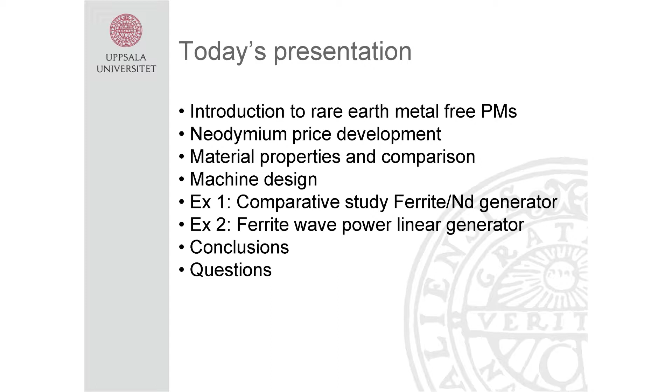So this is what I'm going to talk about today. I'm going to talk about rare earth metal-free permanent magnets and give an introduction to the topic, and also the neodymium price development, which kind of started the look for new materials. I will also go into material properties and compare a few different materials. Then I will go into machine design and discuss how we can change our machine design depending on what kind of material we have. Then I will present two examples on the work we have done on Ferrite generators, and then some conclusions and some time for questions.

And you will be able to follow where I am at in the presentation on the left side here.

Okay, so I come from a division that is working with very applied research. We work with wave power, wind power, and marine current power. We actually build prototypes, even full scale if possible, and do experiments and try how they work. We also have a lot of spin-off companies in these different areas, so we try to bring the products out on the market.

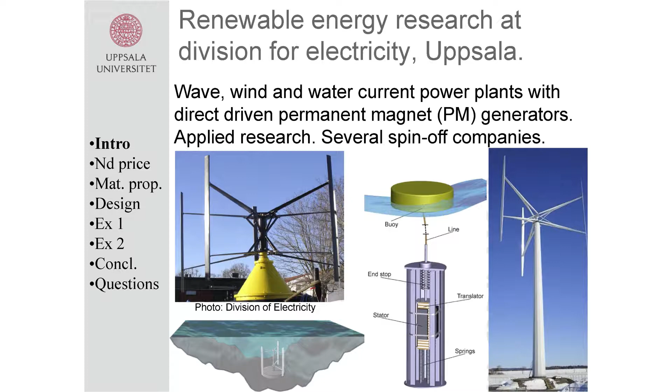We work with vertical axis wind turbines, which is a different type of wind turbine. I'm not going to go into that much, but we have the generator on ground level, which is quite convenient, especially if you happen to have a heavy generator, which I will come into later.

We also work with vertical axis turbines for marine current energy, so we can put these power plants in a stream or in a tidal water and harvest energy. This is the first prototype that was installed in March, and here is how it might look when it's on the seabed.

And then we also work with wave power. This is based on a buoy as a point absorber, and when it moves up and down with the waves, it will pull the translator of this linear generator also up and down. This is maybe the most mature of these products if we look at the spin-off companies.

So we're actually building the first 42 wave power plants right now, or wave power units, for a farm. It's going to be 420 wave power units in this farm. It's ordered by Fortum, and it's going to be placed outside of Sweden. So that's quite a big project.

And for all these different energy devices, we use direct-driven permanent magnet generators. When it comes to direct drive, the generators are quite big, so we also have quite a lot of permanent magnet material in them. Therefore, it's quite interesting for us to look at permanent magnet materials.

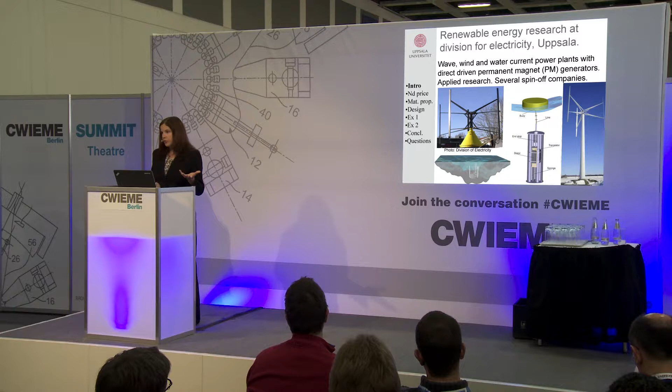Five years ago, we only looked at neodymium-based magnets, but now we're looking at some options. So we're trying to find some rare earth metal-free options. And why do we want to do that?

Well, first of all, the price development. I will show you a picture of that later, but I think you are probably all aware of the problems with the price when it comes to neodymium.

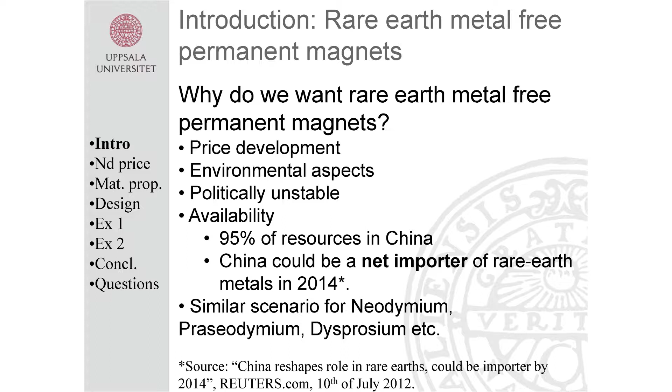We also have the environmental aspects, both for the environment as such, but also for the work environment, for the people working in the mines. Also, it's a politically unstable matter, since most resources come from one country, and it's connected also to the availability.

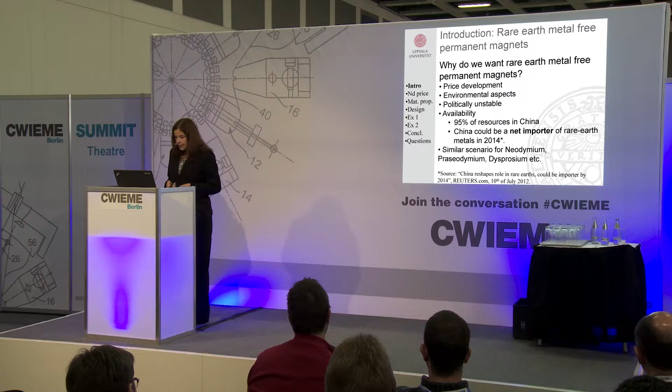95% of the resources are in China, and there's actually quite a stunning report from Reuters, which I found, where they said that China could be a net importer of rare earth metals in 2014. That would be quite interesting. The scenario is quite similar for neodymium, praseodymium, and dysprosium. So it's quite interesting to look at options then.

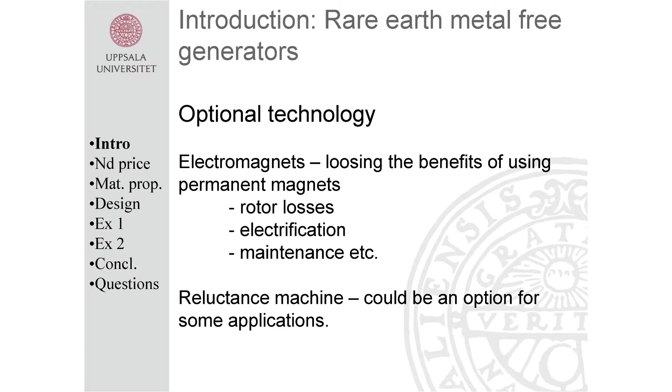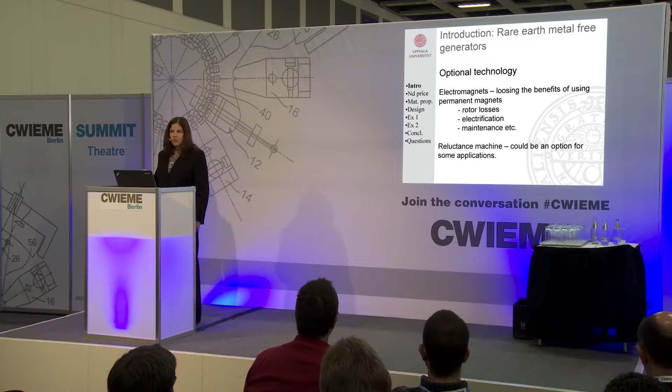If we're looking at options for generators and motors, of course we can look into an optional technology. We could have electromagnets, however then we would lose all the benefits with having permanent magnets. We would get more rotor losses, we would need to electrify the rotor, we would need more maintenance, etc. Another option would be reluctance machines, and I know that is especially investigated for electrical cars, to use reluctance machines.

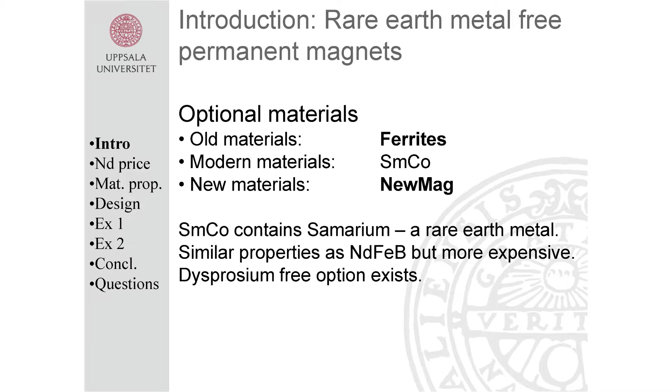But we are instead looking at optional materials. What we have been mostly looking at so far is an old material, the ferrite, which has come a long way - the new grades are quite good. We also have some other modern materials apart from neodymium iron boron, like samarium cobalt. However, they are also rare earth metals, so we'd like to not use them.

And then we're also looking at new materials together with some material researchers at the university. Here I call this new material NewMag, because we don't really know yet what material it's going to be made of.

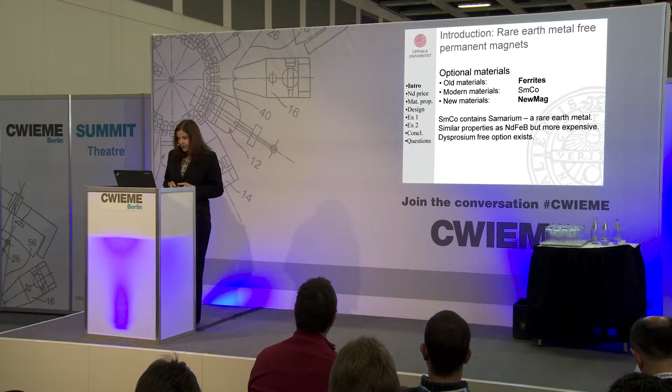So this is a graph on how much the price increased this summer of 2011. The price of neodymium metal increased more than 1,000% from the summer of 2009 to the summer of 2011. And this makes this business quite difficult, and the price is difficult to predict.

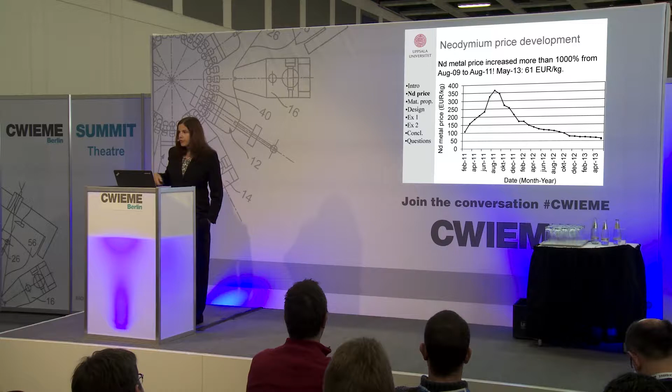This summer, I guess, was kind of the starting point for looking at rare earth metal-free options for permanent magnets. Now the price has decreased quite a lot, but it's still quite high compared to the levels where it was maybe 2007. It's about 61 euros per kilo last month, but it's varying a lot. So therefore, we would like something more stable.

So I'm going to talk a little about material properties and compare some different materials. I just wanted to go into some of the important characteristics or parameters for the materials.

The remanence, the remaining magnetic flux density in the permanent magnet, and then also the coercivity, especially the intrinsic coercivity, which is the external field for which the magnet is permanently demagnetized. It could be partially or totally demagnetized, and then we lose its remanence and it's not a permanent magnet anymore.

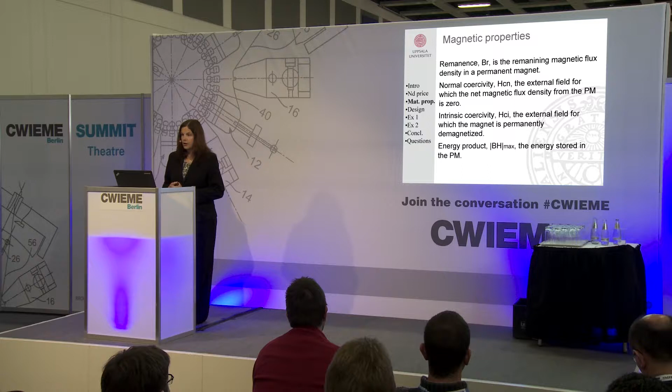So that's really bad. And then the energy product is quite important, since it will tell us how much magnet we need. It's the energy stored in the permanent magnet.

Some other properties that are interesting to look at when comparing materials is the strength of the material. Some materials are quite brittle, and especially when they're mounted, we might get cracks in them. So the mounting procedure is usually the most challenging part.

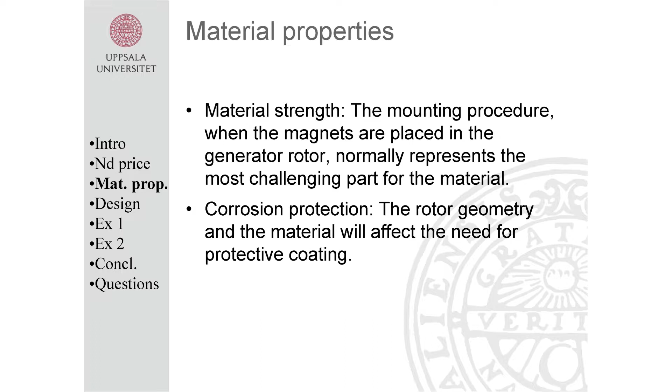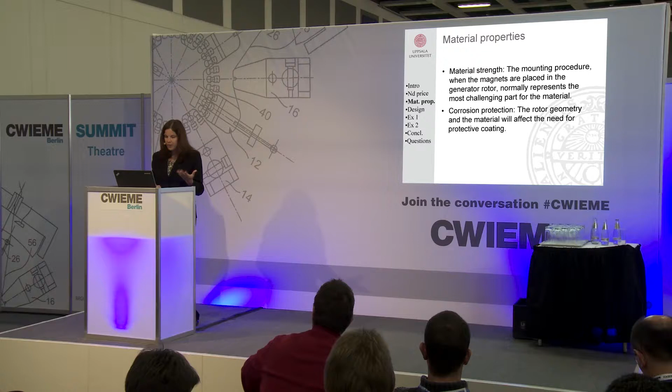We also need to know if we need corrosion protection. Like neodymium-based magnets usually need protective coating if they're not placed inside some cover. So it depends on the geometry as well, but usually you need some coating.

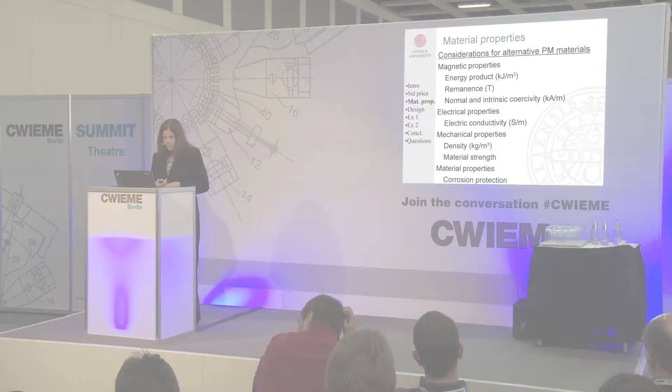So if we're going to compare some different permanent magnet materials, we need to consider these magnetic properties. We also need to consider electrical properties, such as electric conductivity, since this will affect how much eddy currents we might develop in the rotor or in the permanent magnet especially. Since eddy currents are losses, and they will also heat up the material.

And a lot of the magnetic properties will get worse when the material is heated up. Not all, but most. When it comes to mechanical properties, material strength and also density, how much volume we need for a certain weight, and also the corrosion.

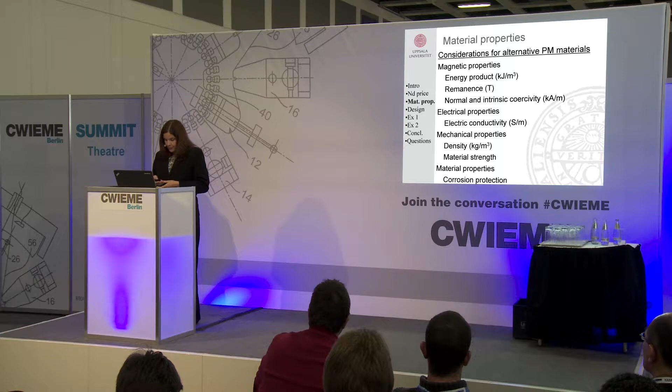So here we're comparing neodymium iron boron, which is kind of the base, since that's what we used to use. And then we compare it to ferrite and to this new material. The neodymium iron boron has a high remanence and also a quite high intrinsic coercivity, so it's very well protected against demagnetization. And it has a high energy product, so we get a lot of magnetic energy per kilogram or per cubic meter.

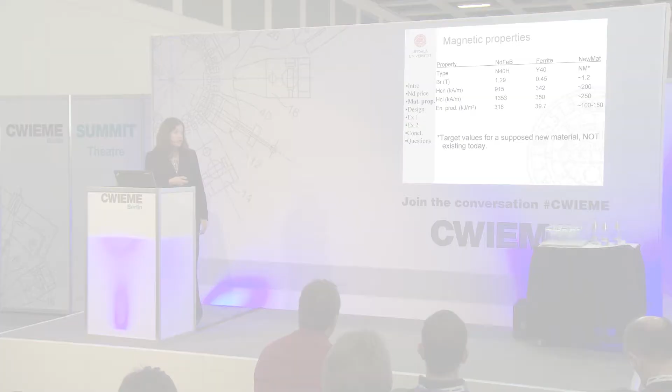When it comes to ferrites, if we look at one of the new grades, Y40, it's actually quite good. It has a remanence of 0.45, so it's better than the old ferrites, but it's still about 3 times lower than the neodymium magnet. The coercivity has also been increased somewhat compared to earlier products, but it's still quite low, so depending on the application, this needs to be considered. And the energy product is quite much lower than the neodymium energy product.

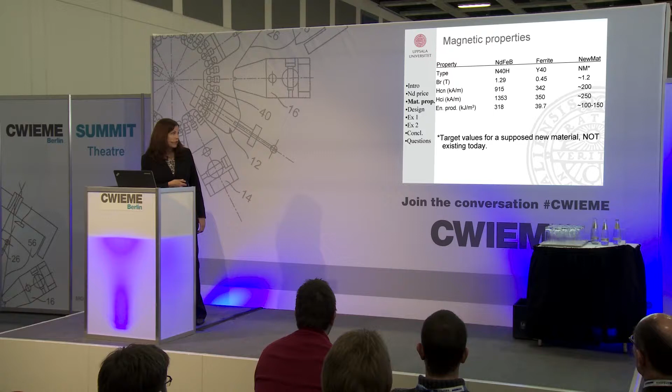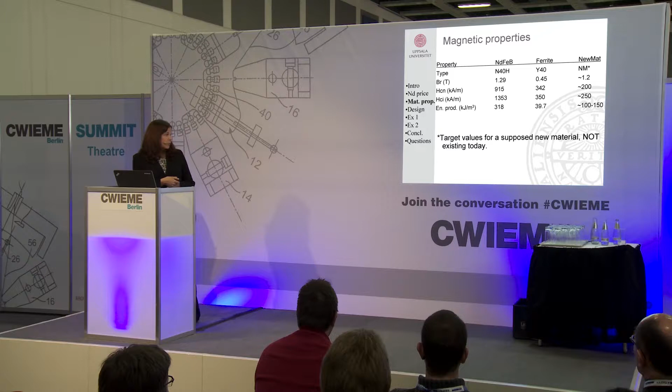This new material is one that my colleagues are looking at right now, where they think they can reach quite a high remanence, but they have some difficulties increasing the coercivity. So these are some values we think we might be able to reach, and the energy product estimate is quite optimistic. It might be more about 150 or 100, but it's 2 or 3 times less than neodymium.

And if we look at some material properties, like the material strength, we know that the ferrites are quite brittle, so we need to consider this when we mount the magnets, for instance. However, since they are not as strong and don't have as high magnetic energy, they might be easier to handle.

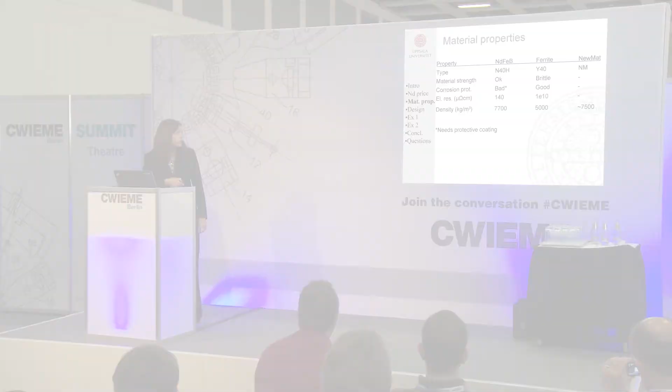When it comes to corrosion protection, it's quite bad for the neodymium magnet, as I said, so we need some coating, but the ferrite is quite good. And then the electric resistivity, which is the inverse of the conductivity, is very high for the ferrites, so we won't have any eddy currents developing in that material.

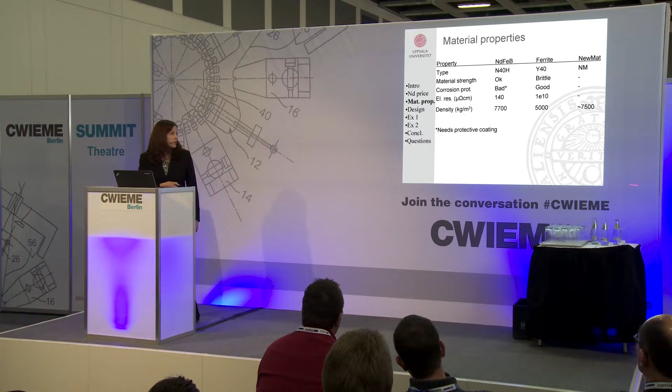We might have some problems with eddy currents in neodymium-based magnets. I don't have numbers for these things for the new materials, but the density would be somewhat close to neodymium, where the density for ferrites is a little bit lower.

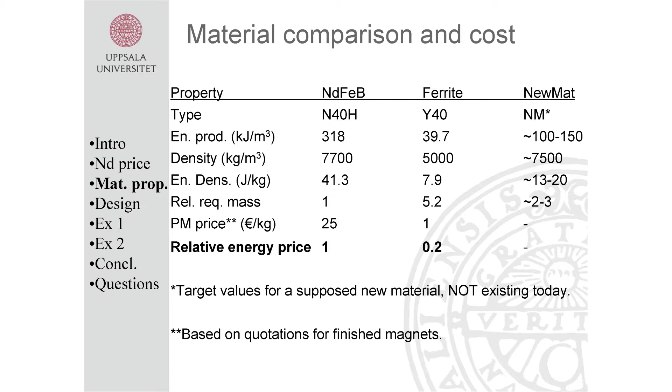If we put price into this equation - these are some quotations for a 200 kilowatt wind generator, so quite large magnets, large pieces which are a bit more costly to produce. It's about 25 euros per kilo for neodymium-based magnets, and about 1 euro per kilo for ferrite-based magnets in grade Y40. So we can get a relative energy price: how much magnetic energy do we get per euro? Normating this as 1 for neodymium, we only pay 0.2 for the ferrite. So for the same amount of magnetic energy, we only pay 1/5 for ferrite magnets, while we pay 5 times more for neodymium.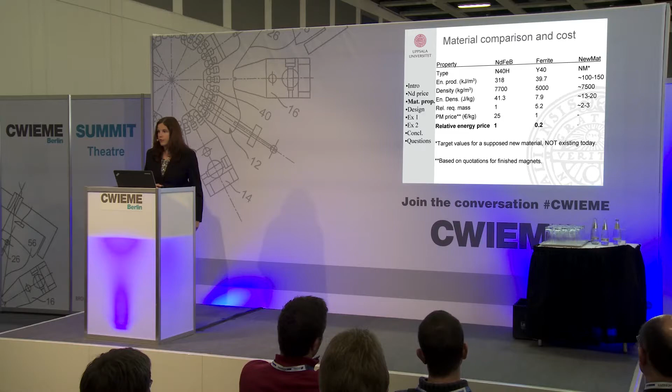We don't have any price for this new material yet. However, if it's going to be comparable and able to work on the market, it needs to be quite cheap as well, which is a challenge for the material researchers. But again, the mass is 5 times more for the ferrites, so that's a disadvantage in most cases.

So if we go into machine design instead and try to see what we can do to adapt it to different magnetic materials, we need to consider what machine properties will affect the permanent magnet choice. One factor, not shown here, is whether we have any restraints on volume and weight, because that will have a big influence.

Then we need to consider if the machine is going to be a motor or generator, what rotational speed we have in case we have large centrifugal forces that need to be considered, and what electrical frequency we have. For these renewable energy applications I showed you before, we have around 10 Hertz for most of them as rated frequency. That's quite low, so the harmonics also get quite low, meaning we don't have that much problem with eddy currents, for instance.

We also need to consider the operating temperature and cooling system - how hot do we allow the machine to get, and what can the magnets handle? Most magnetic properties get worse when heated up, some don't. The remanence can decrease, the coercivity can decrease, but coercivity can also increase, depending on different materials.

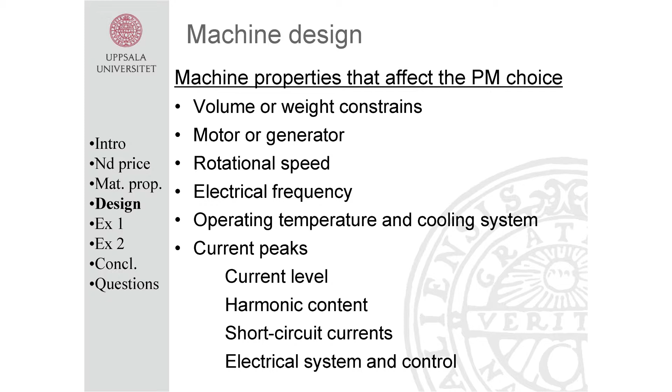We also need to consider current peaks, to make sure we don't get a field from the stator in the generator that is higher than the intrinsic coercivity. This depends on the current level, short circuit currents, and also the electrical system and control - what kind of current we actually take out of the machine.

Harmonic content needs to be evaluated as well, again to see what kind of eddy currents we get. If we have a lot of harmonics, we might also get a lot of eddy current losses.

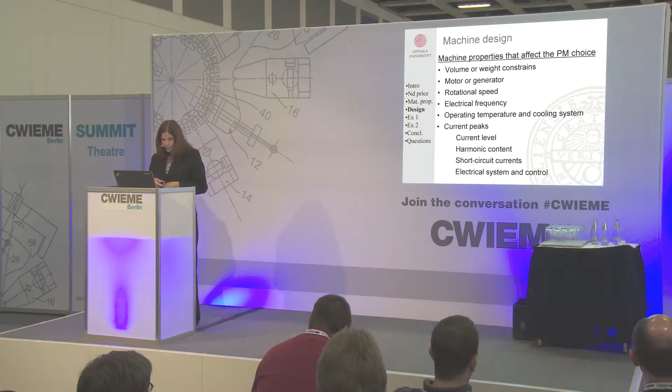So if we look at how different rotors could look - if we use a standard design with stator steel, the desired magnetic flux density in the air gap is somewhere around 1 Tesla, in order to use the steel as a field reinforcement. If we have low remanence, we need to reinforce the field somehow from the rotor to the stator so that we get this higher magnetic flux density in the air gap.

If we have low intrinsic coercivity, we also need some field protection so that we can protect the magnet from the adjacent field from the stator.

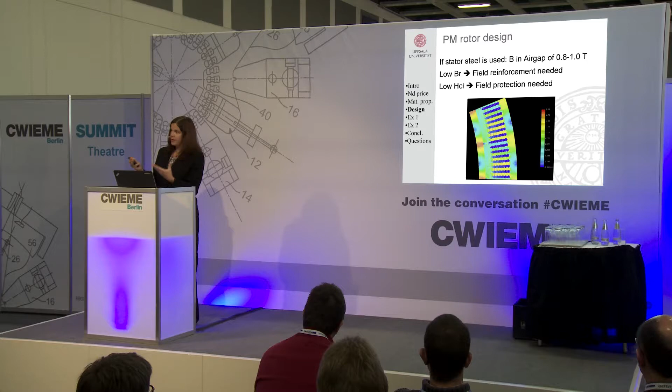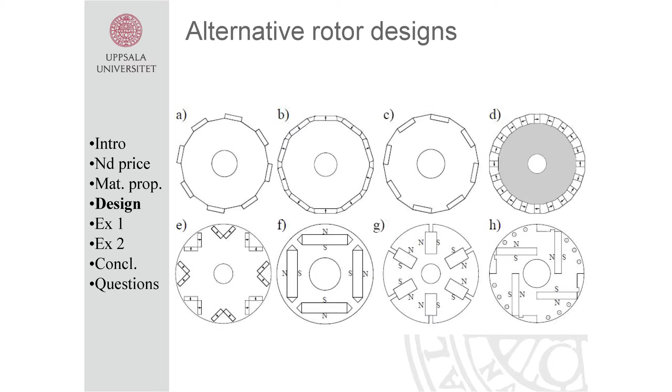So here are some examples of how different rotors can look. We have 3 different designs of surface-mounted magnets, which is the most common design. Here we have a design with the tangentially magnetized generator. And here we could actually have much longer magnets that go further into the rotor - I'll show you an example later - so that we could reinforce the field using this design.

Then we have several innovative designs here on how you can have interior magnets. However, you also need to consider how you're going to mount this and how you're going to produce it, because some of these might actually be quite difficult to build.

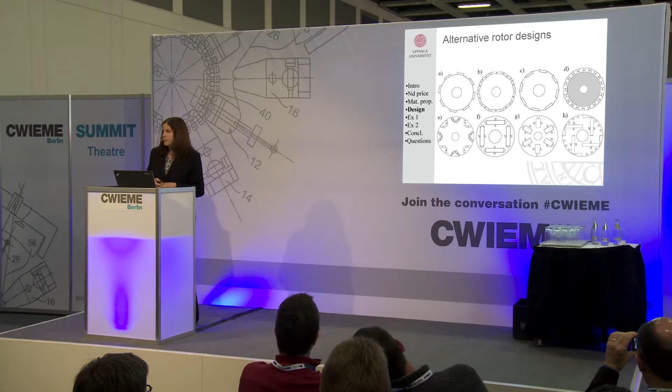So if we look at the neodymium-based generator again, we have a high remanence, a high coercivity. So we don't need any flux reinforcement, and normally we don't need any extra protection against fields. We can have the magnets radially magnetized in this direction and surface mounted, and that's the most common way for neodymium-based magnets.

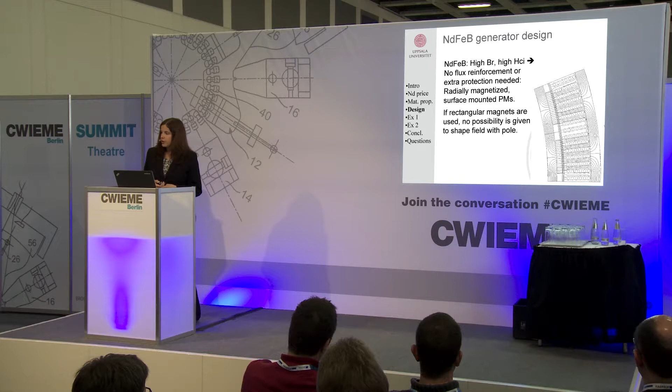One disadvantage, if we want to use rectangular magnets, which is the cheapest to buy, is that we don't have any possibility to shape the field with the pole, which we have in some other designs.

If we look at the ferrite, we have low remanence and low coercivity, so we need some kind of flux reinforcement and protection against adjacent fields. One option is to have them tangentially magnetized, magnetized in this direction and buried into the rotor. The flux comes out like this, and goes through this narrow pole shoe, which narrows down the field so the magnetic flux density becomes much higher. Here we can achieve about 0.9 or 1 Tesla in the air gap, just as desired, by reinforcing the field with this pole shoe. Also the magnets are quite protected when they're inserted in the rotor like this.

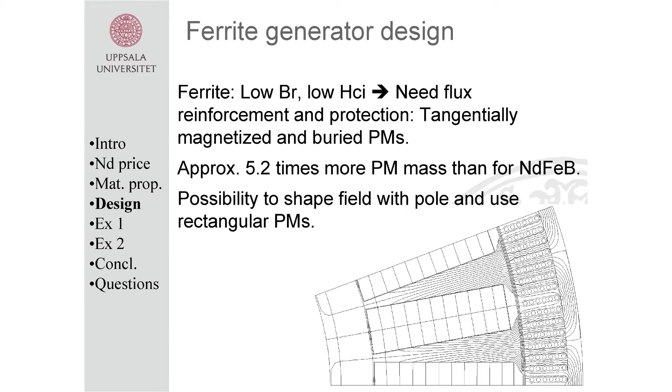However, as I said before, we need to consider that the mass will be 5.2 times as much. Also the volume is even more, since we have less density for the ferrites, so we have even more magnet volume. So the rotor becomes quite large.

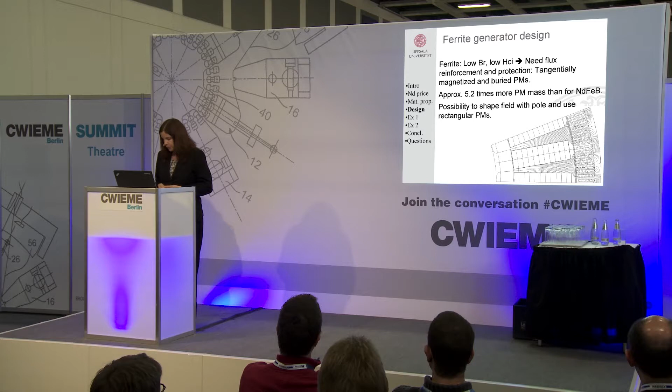One advantage is that we can shape the pole shoe here, so that we can get the optimal shape on the field and still use rectangular permanent magnets, which are mass-produced. That's quite good.

If we then look at this new material instead, we have high remanence but low coercivity. Here we don't need any reinforcement because we have quite high magnetic flux density, but we need to protect the magnets somehow. So we can have them radially magnetized, magnetized in this direction, but buried, so we have some iron in front of them that can protect them from fields. That's one option to do it.

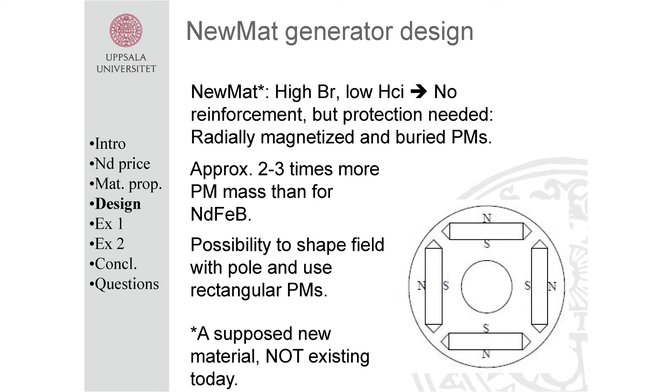And then we would again have about 1.5 or maybe 2 or 3 times the mass of neodymium magnets. We also get the option of shaping the pole and therefore maybe get a better field shape, and still use rectangular permanent magnets.

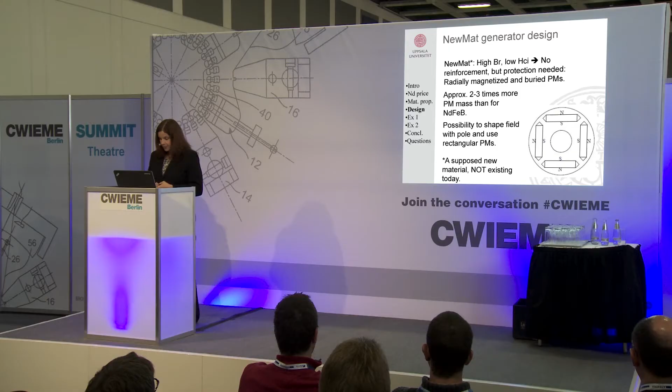When it comes to the ferrite rotor, we have some design issues we need to solve. Of course we need to achieve this high magnetic flux density in the air gap, so we need to somehow reinforce the field. We need to consider how to mount the permanent magnets, because it's quite difficult to mount them in this round shape.

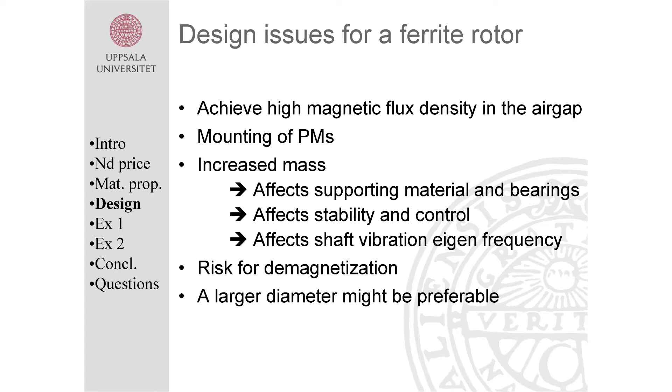Also, we need to consider the increased mass compared to a neodymium generator, for instance. This will lead to needing more supporting materials, other bearings, and a different shaft vibration eigenfrequency, so it will change the machine quite a lot if we change neodymium magnets to ferrites. It will also affect stability and control, but that might actually be beneficial - for example for a wind turbine, we will get more inertia, so there will be less change in speed, a little slower, which might be good.

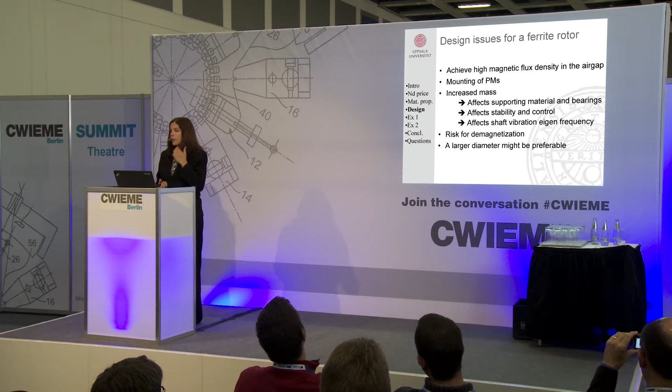We also need to consider the risk of demagnetization, since the coercivity is quite low. And we might actually want a larger diameter to fit all this volume inside the rotor, compared to the neodymium-based generator.

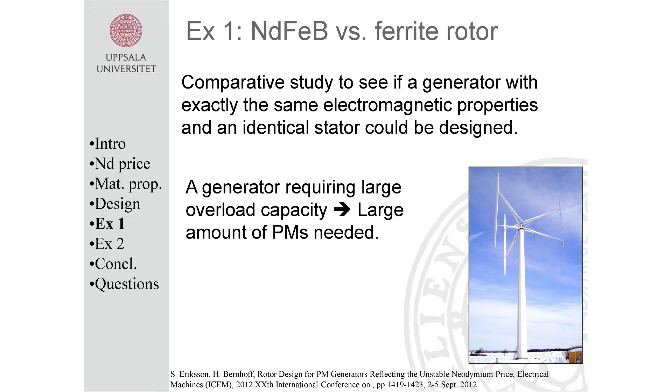So I'm going to give you an example. I did a study last year to compare a generator for wind power and to see if we could get the same electromagnetic properties if we had a ferrite generator compared to a neodymium-based generator.

The idea was to have the same stator and just change the rotor. This generator was to be built or designed for a vertical axis wind turbine of 200 kilowatts, so it could be placed on the ground level, so the weight increase didn't matter that much. This was presented at the conference last summer.

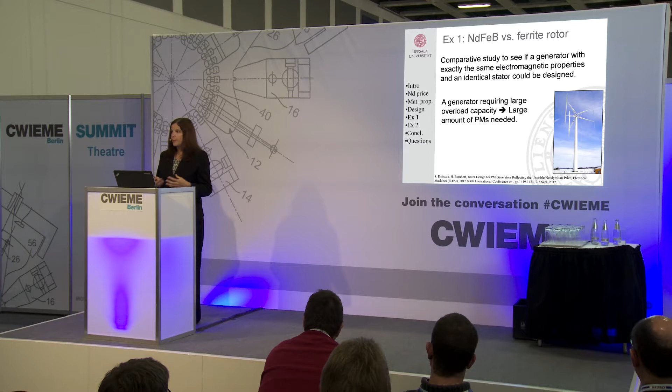Also, we don't have any pitch of the blades for this wind turbine, so we need to control the whole turbine electrically. So we need a quite high overload capacity of the generator, so it's a little bit over-dimensioned, and therefore we have quite a large amount of permanent magnets.

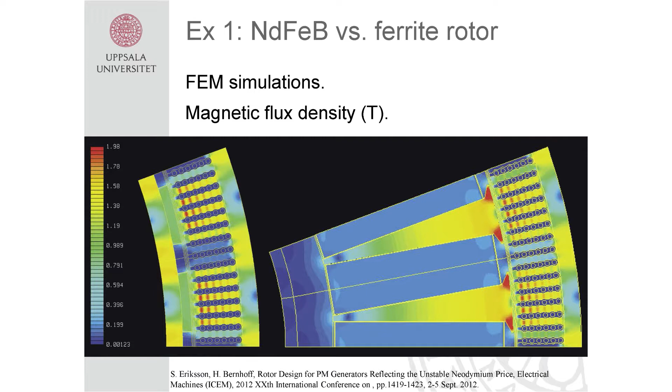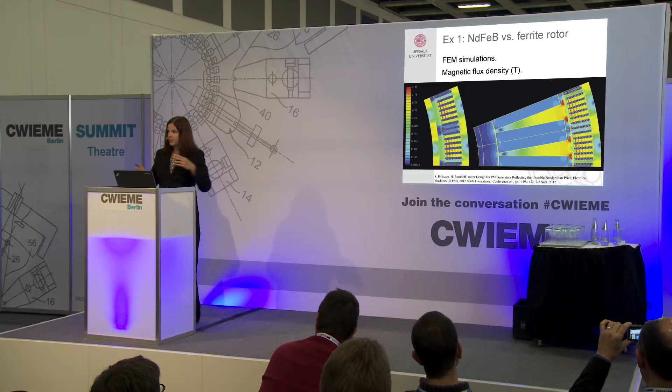So this is the result. Here you see the first generator - we have the same stator in both cases. This is the surface-mounted neodymium iron boron magnets. And here we have the ferrite magnets tangentially magnetized between these pole shoes. These two are then very similar in properties. You can see the differences in volume.

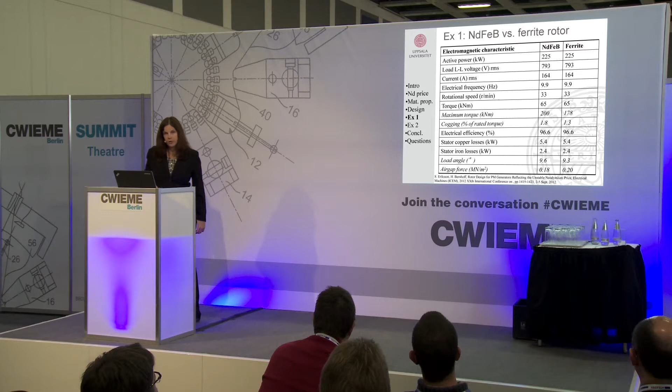And if we then compare the electromagnetic characteristics, we see that they are very similar. We have a few differences here in italics - the maximum torque, the cogging, the load angle, and the air gap force differ a little bit, but not that much. So we have actually achieved to design a generator with pretty much exactly the same electromagnetic properties.

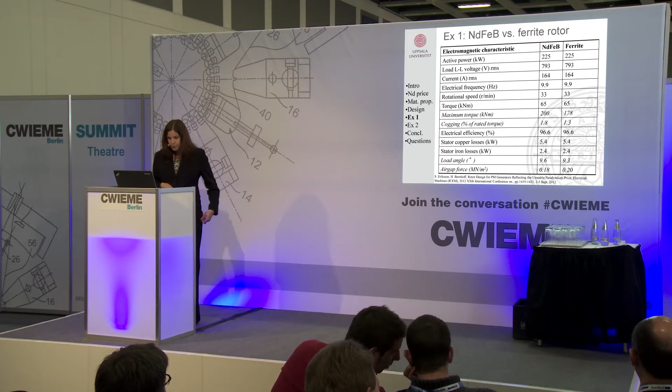However, of course, we have one big difference, and that's the mass of the rotor. In this case, we used a grade Y30, which is a little lower energy product. So we got a permanent magnet mass that was 8.6 times higher for the ferrite generator, and the rotor weight was approximated to be about 3.3 times higher. So that kind of changes a lot.

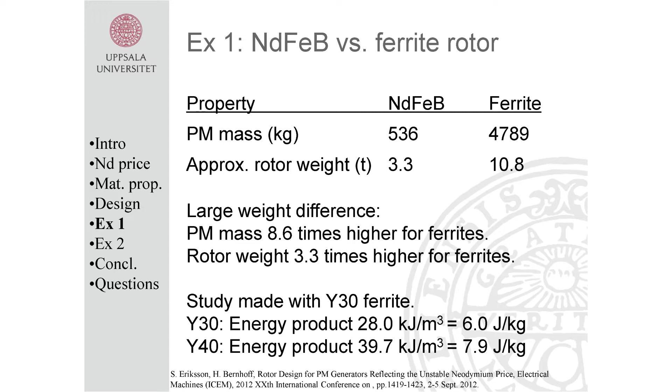However, we see here that the Y30 has an energy product which is about 70% of that of Y40. So if we would do this study with Y40, we would get better results when it comes to the weight.

However, for this vertical axis wind turbine, it's actually not a big problem with this increased weight, so we can handle that. But for a horizontal axis wind turbine, we wouldn't want to add a 3.3 times heavier rotor, probably. So that's

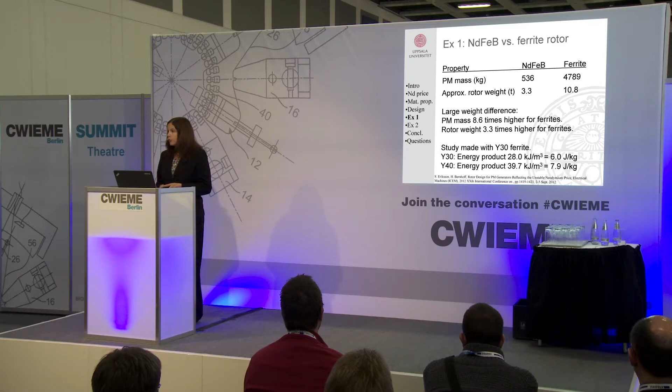A bigger problem then. So the conclusions from this comparative study was then that it was possible to design this ferrite generator with the same or similar electromagnetic properties. And when the weight is less of an issue, ferrite seems to be a viable option.

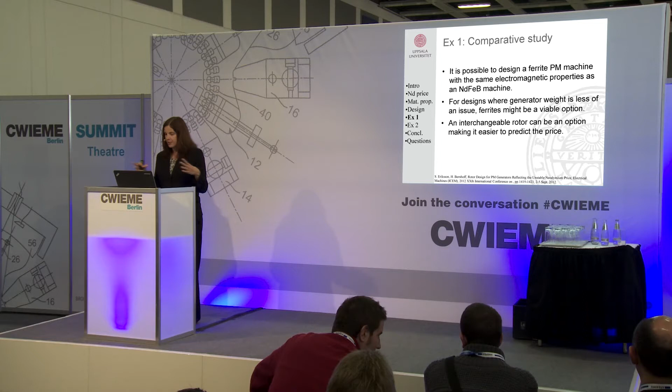And also we had an idea then that if we would mass produce this kind of generator with the same stator, we could actually change the rotor comparing to the current neodymium price. So we could have a ferrite generator rotor sometimes and a neodymium rotor sometimes for the same machine and the same stator, with everything else being similar.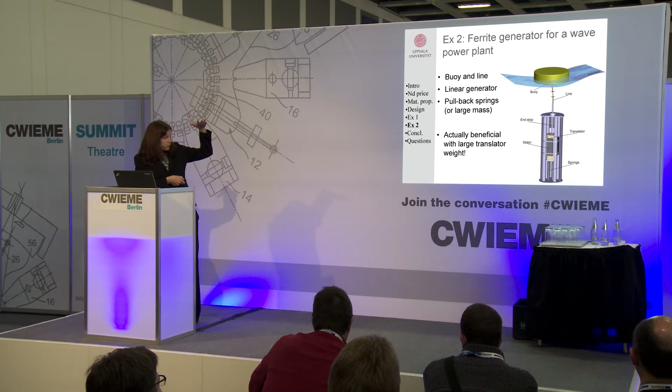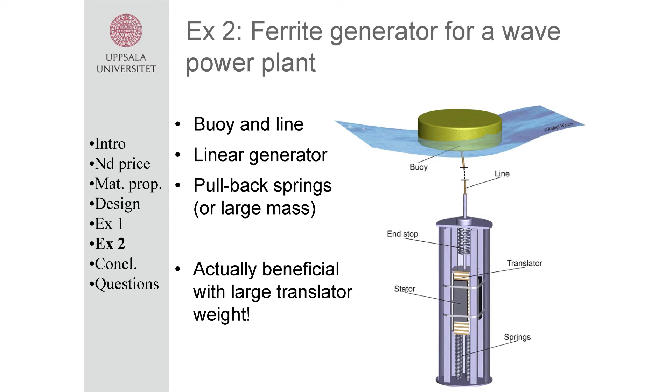The second example here is a wave power plant. As I said before, we have this buoy connected to a line and then connected to this translator inside a linear generator. This buoy pulls up the translator when the wave moves up, but when it moves down with the wave, this line actually slacks. So we need to somewhat overcome the electromagnetic forces in the generator and pull down the translator.

Which we have solved with springs. But then in the next generation, we looked at a large mass instead. So we had a big ballast here in the bottom, just to pull it down. So then you think, okay, why don't we add a heavier permanent magnet material instead, since it's actually beneficial with a large translator weight in this concept.

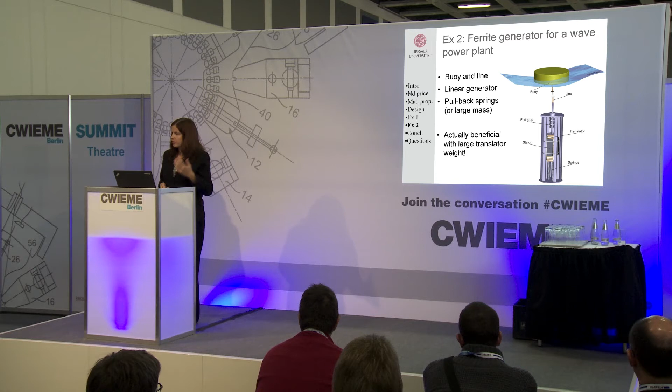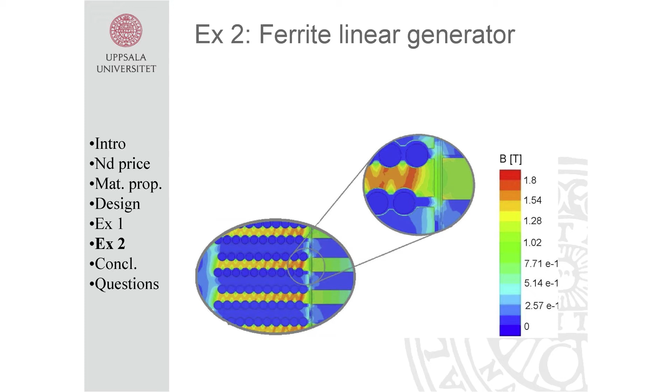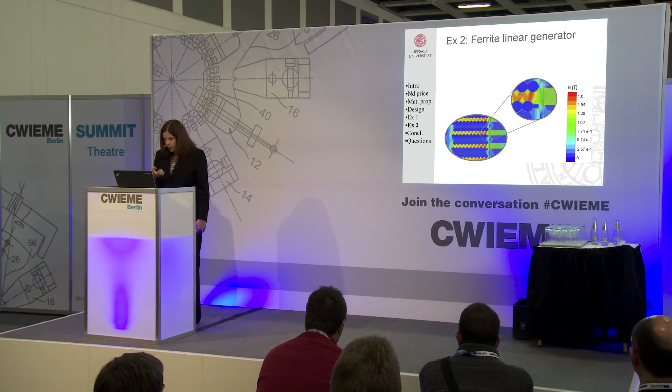So this is actually a perfect generator to look at for the ferrite option then. This is a first design of a ferrite linear generator. Since it's a linear generator, we can have rectangular pole shoes and rectangular magnets, so it's quite easy to produce because you just have these rectangular pieces. It's much more cheaper than to make these

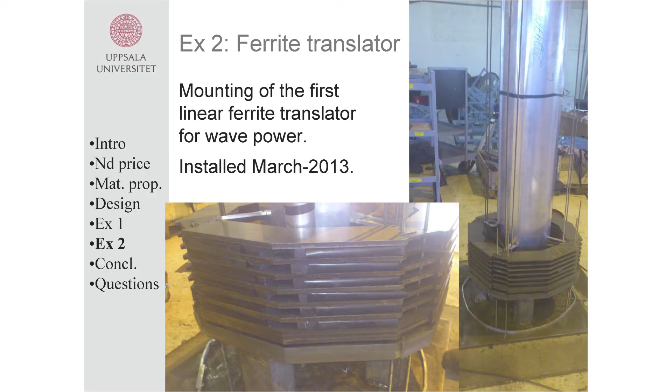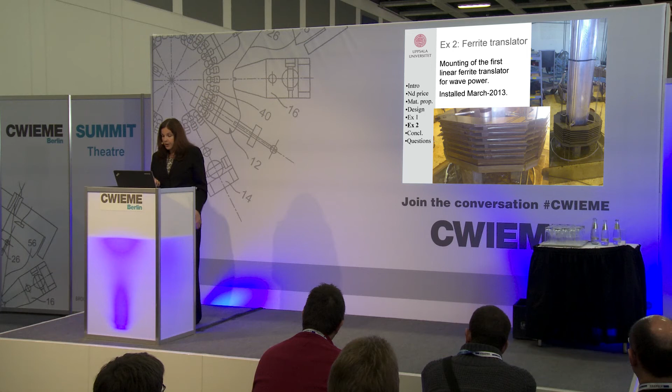Pole shoes otherwise. And here are some pictures from the mounting of the first linear ferrite translator, the first one that we know of, at least. This was installed in March 2013, so we're kind of starting to look at the results from it now. But the mounting actually went better than we expected with all the magnetic forces to consider.

Okay, so some conclusions of this presentation then is that it's important to find alternatives to neodymium and other rare earth metals, and especially for environmental reasons, price, and availability. We need to have something that is more, where we know what we're going to get in 5 years as well. And ferrites are then a viable option.

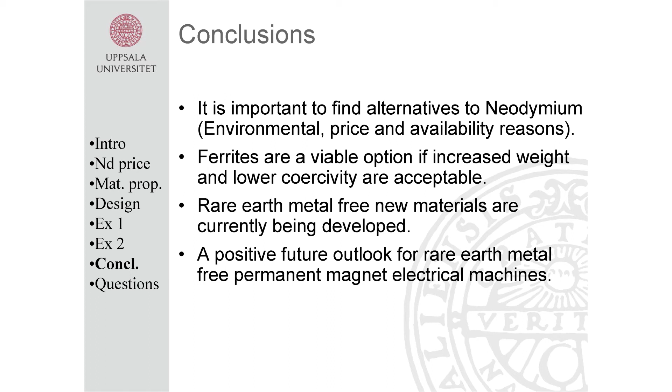However, we need to be able to accept the increased weight, as we are in the vertical axis wind turbines and in the wave power plants, it's fine, but for other applications it might be worse. And then we need to be able to handle this lower coercivity as well, and that also depends a lot on application for the machine.

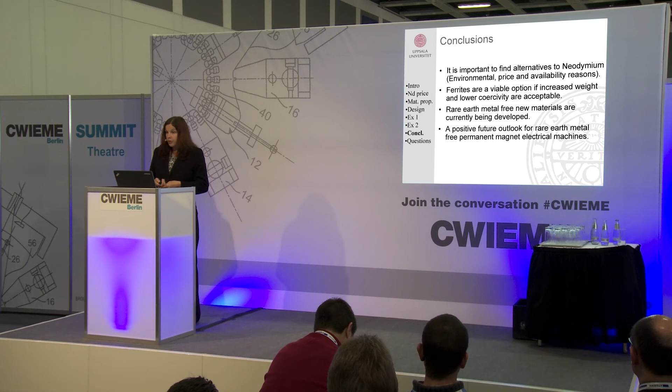So currently, rare earth metal-free materials are being developed. So we see a future outlook for the rare earth metal-free permanent magnet electrical machines.

And what can we do next, and what can you do next if you are machine designers then? Well, you could consider ferrites as an option for your applications and see if it would work with the increased weight and lower coercivity, depending on application, of course.

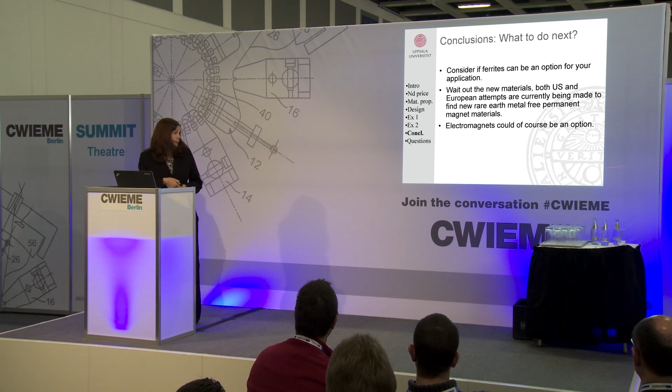And then there's also the option to wait out these new materials. There's a lot of research going on now, both in Europe but also in the US, on finding rare earth metal-free alternatives. So hopefully something is gonna come out on the market in a few years. And then of course there is the option of changing the design, maybe go for electromagnets instead.